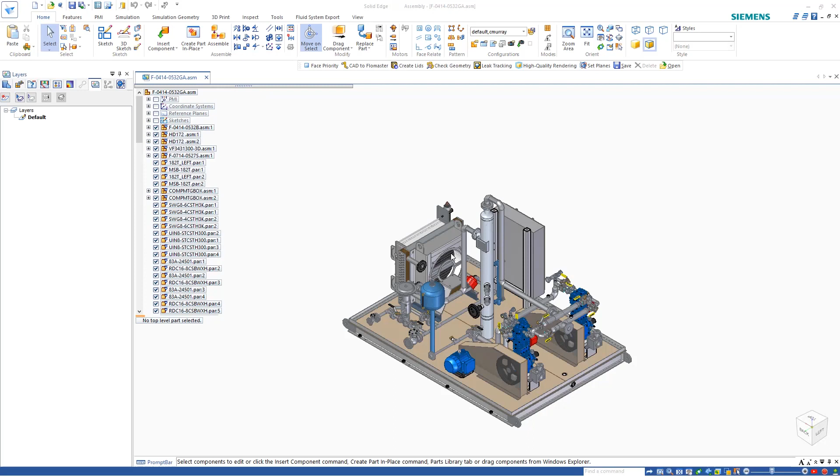Improve the flow of piping system design with Simcenter Flomaster for Solid Edge. The unique CAD to Flomaster technology extracts the geometry from a Solid Edge assembly and automatically creates the corresponding fluid volume that exists inside pipe runs and components.

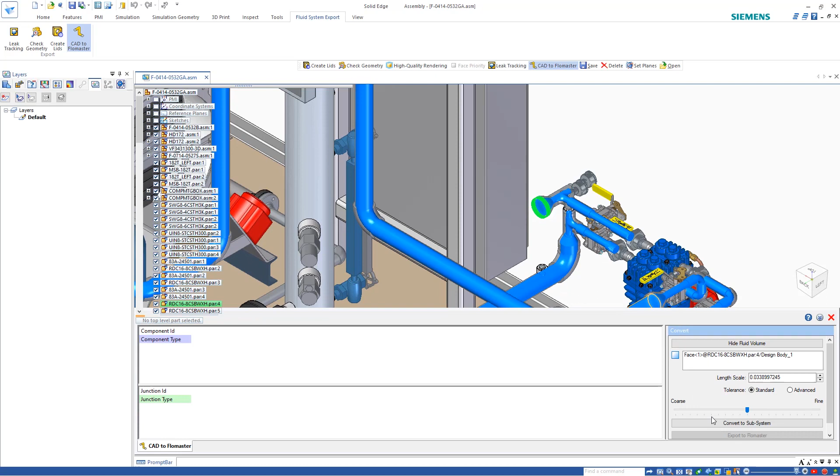During this process, a face can be selected to give a length scale and convert the system to a subsystem. The abstraction process is fully automated, but there's also full control over the fidelity of the model, which can be adjusted with the slider bar. Individual elements can be inspected, deleted, or merged.

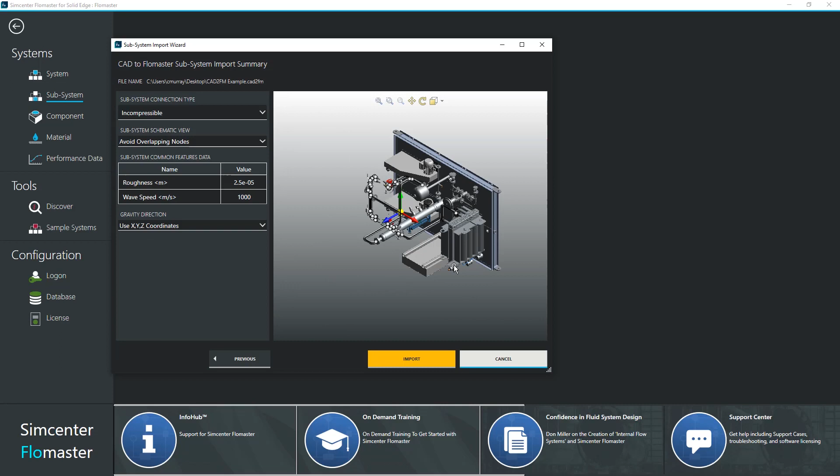Once the network configuration is defined appropriately, the geometry can be exported to Flomaster. Following export, the file will be saved for reuse, then automatically opened in Simcenter Flomaster for Solid Edge in the Subsystem Import Wizard.

The CAD geometry, center line, and component connections can be seen in the wizard, and the model can be rotated to the desired projection when the network is created. On selecting import, a new subsystem will be created for review. The entire subsystem can be used to create a model, or individual pipelines can be extracted into their own subsystems.

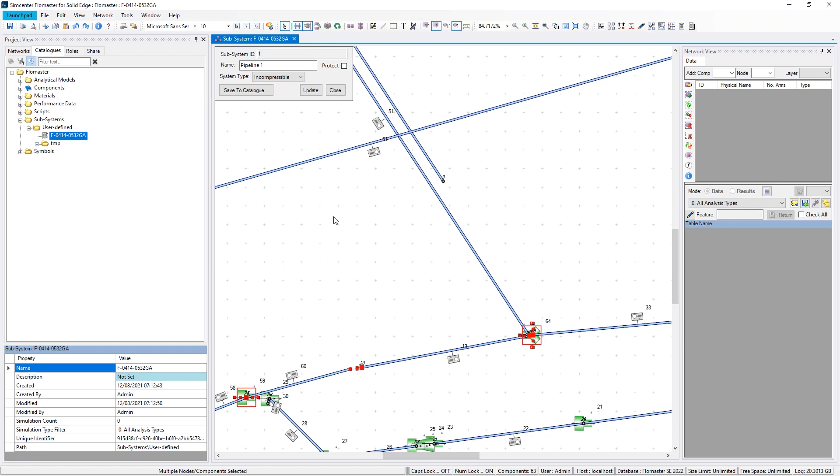For the flow analysis of this model, we're going to extract the pipe from the two compressors to the central vessel. We'll create a second subsystem from the first and save it to the subsystem catalog. We'll now add the subsystem to a new network and specify the boundary conditions using pressure sources. We'll specify the compressor outlet pressure and the vessel inlet pressure.

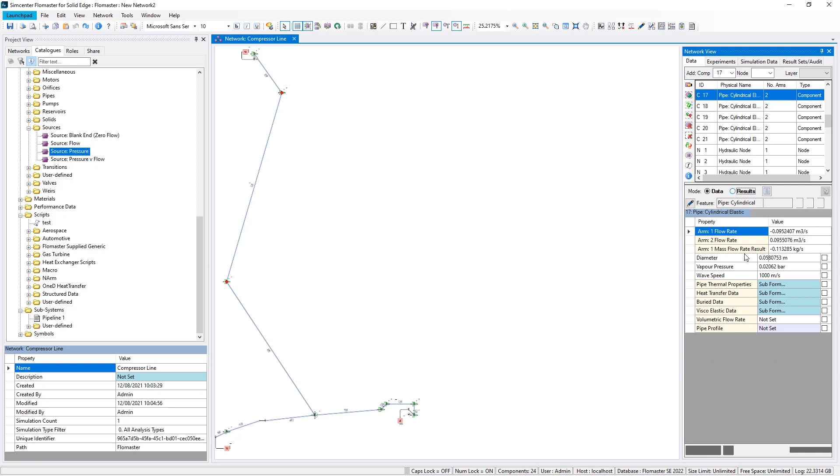For this low pressure system, we'll specify air as the working fluid and run a static simulation. Following the simulation, we can look at the results for individual components or look at the whole system using network visualization. With this, we can quickly oversee flows, pressures, and velocities.

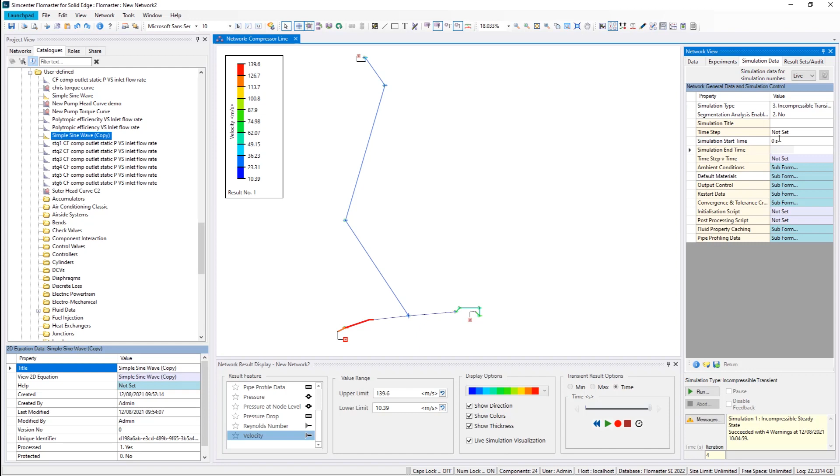Next, we'll look at the effects of the pressure pulses from the compressors on the system. We'll specify curves defining the pressure pulses to the sources and then run the transient simulation. Following the simulation, we'll look at the flow into the tank where we can see the effect of the pressure pulses from the compressor. Then, moving to the compressor outlets, we can enable transient visualization and see the variation in flows and that the larger flow is from the left-hand compressor.

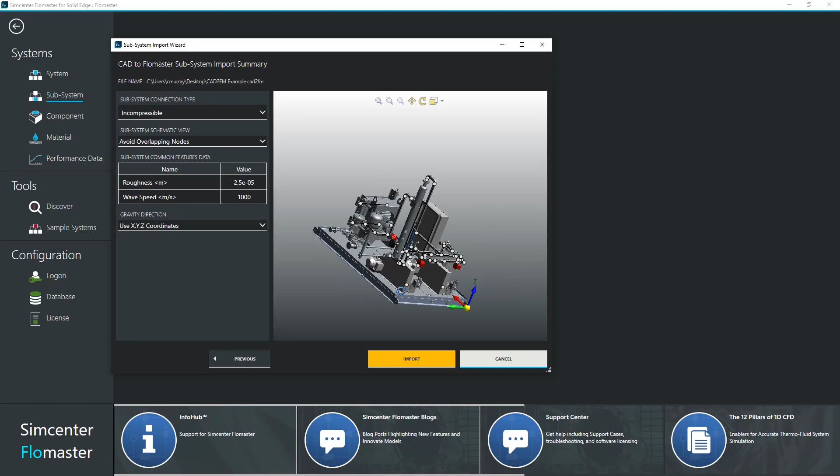Simcenter Flomaster for Solid Edge, providing best-in-class thermo-fluid simulation capability to the mainstream market.